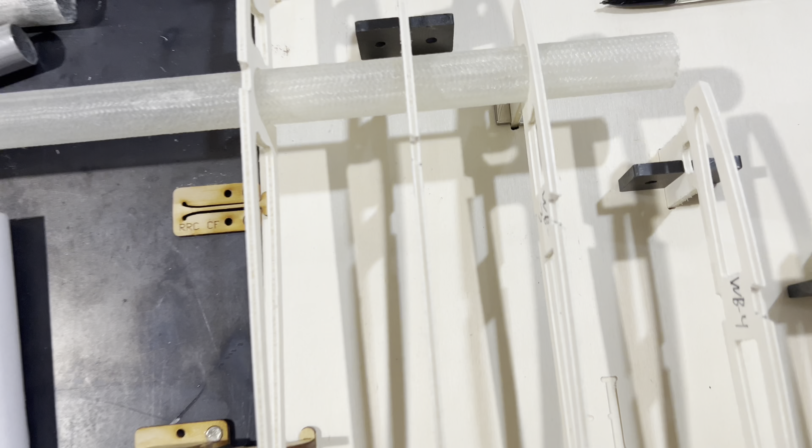canard, you want to make sure you do take the time to go ahead and angle, as you can see here, the slots that the spar is going into, and also the front spar and also the rear spar as well. That's important. And don't forget your leading edge. If you look at your leading edge there, you can see it's also angled as well. So that's important.

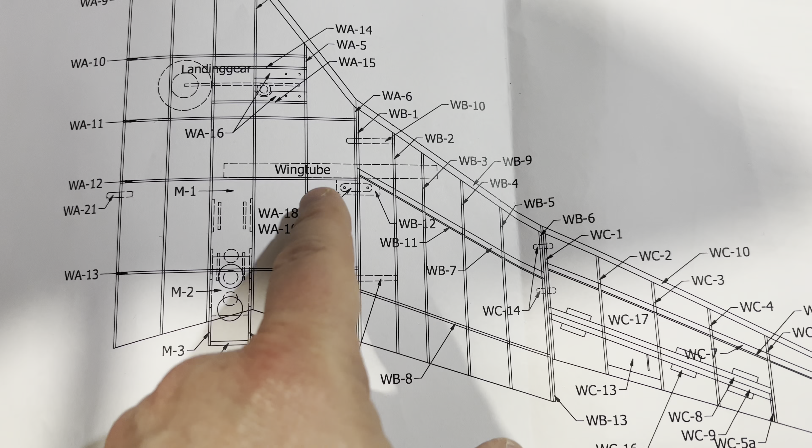So let me just show you where we are. We are here. We're working on this section right in here. And you'll notice that there's going to be a wing tube inserted here. And we have that partially inserted just to help line up the ribs. All right, friends. More to come.

All right, friends, as we continue our update, you can see the right mid wing panel is done. The only thing that we need to do is just to go ahead and round off the leading edge, which we will do in just a little bit. Let's talk about what we're doing right here. You can see we've gone through and we have taken the right mid wing panel and attached it to the right inboard wing panel. And the reason for that is because we're doing two key things.

One, we're checking fit, making sure everything is fitting correctly, and we're checking to make sure we have proper placement for the anti-rotation dowels here, and also we're going to be working on getting our wing tube, which is here, glued in place. So let's go ahead, get that taken care of, and more to come.

All right, friends, you can see we have our wing tube glued in place. What we did is we used some 5-minute epoxy with some fiberglass shavings mixed in, because not only are you gluing it in the holes where the fiberglass tube passes through, but you're also gluing it along the spar right in here, as you can see. So don't be chintzy on the epoxy. Get a lot in there, because as we know, there's a lot of force being generated on a fiberglass tube.

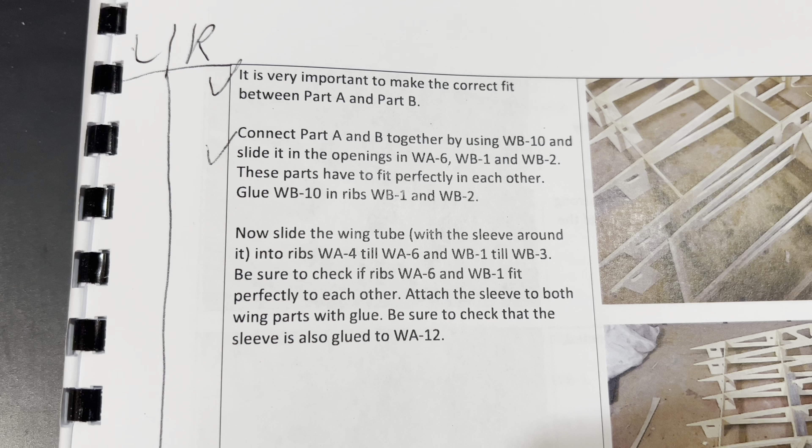And when you read it, it reads as though they want you to attach this fiberglass tube to both wing halves without first cutting the fiberglass tube. Because remember, this tube is all one piece. You don't want to glue it to this half just yet. You want to first glue it to this half, and then what we're going to do is we're going to slide this half of the wing off.

We're going to slide our aluminum tube out of the actual fiberglass tube. And by the way, the reason why we have the aluminum tube inside the fiberglass tube when we glued this is because we want it to stay straight and true. So that way it makes putting the wing halves together easier. But you're going to want to go ahead, slide this half off. You're then going to go ahead and remove the aluminum tubing, and then you're going to cut the fiberglass tubing right here at the separation point.

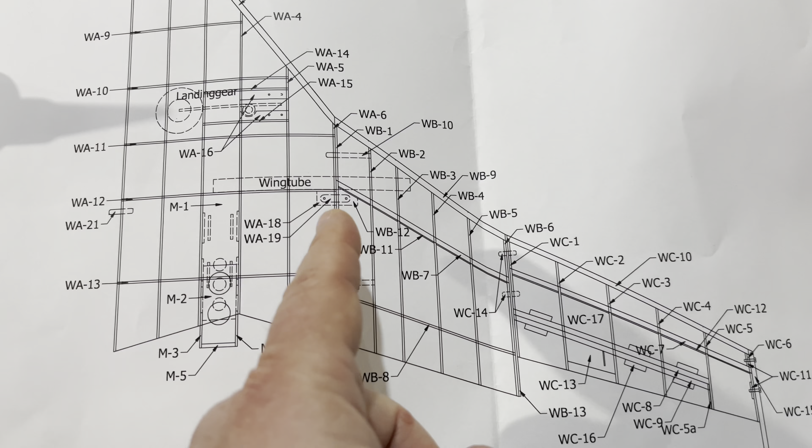Let me show you what I mean on the actual diagram they provide. When you look at the diagram here, you can see part number WA18 and WA19. That's a little screw set that holds the wing halves together, because the wings actually separate this way, leaving just the inboard, middle, and outboard sections. These two are glued together.

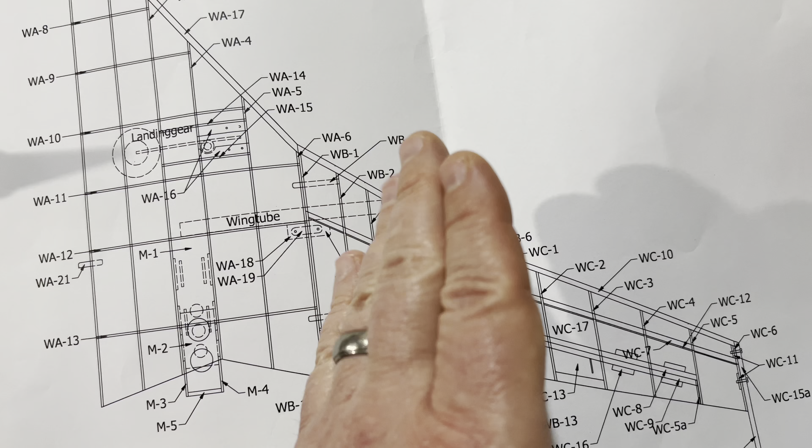But this section here, the midsection and the inboard, are not glued together. They're just held in place with a couple screws. That's why it's important you don't glue the wing tube to both halves, because if you do, you're going to have a permanent wing and won't be able to separate it. Now if you've got a big van to carry this thing, great, but I don't.

So anyway, we're going to remove our clamps, and I'm going to show you what we're going to do next.

All right friends, you can see how we've separated our middle right wing section from the inboard section. We have removed our aluminum wing tube, and now what we're going to do next is cut our fiberglass tube so it sits nice and flush with the right portion of the inboard wing. We're then going to take this section of the fiberglass tube and put it back into the holes you see here in the right mid-wing, then insert our aluminum tube back into our fiberglass tube, and slide the wing halves back together.

Then we will glue the fiberglass wing tube to the midsection here. The reason is because we want to make sure, with the aluminum tube in place, that we have perfect alignment of the fiberglass tube, because once we go to slide the wing halves together, as anyone knows who's had an airplane with an aluminum wing tube, you need to make sure that tube is nice and straight. If not, it can be a bit of a bear with some aircraft to get the wing halves together. So let's cut our fiberglass tube, and more to come.

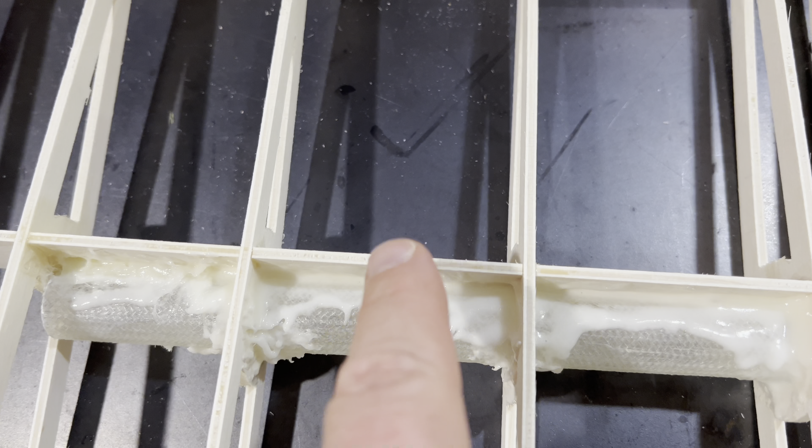All right friends, as you can see our wing is upside down, and we've gone ahead and filled in this area between the fiberglass tube and the spar with epoxy. We've also added additional epoxy where the fiberglass tube inserts through the hole in each of the ribs, and we did that here as well on the middle wing section. So that part of the build is done.

We're going to go ahead now and shift our focus over to what is the beginning of the left middle wing panel you see here, and more to come.